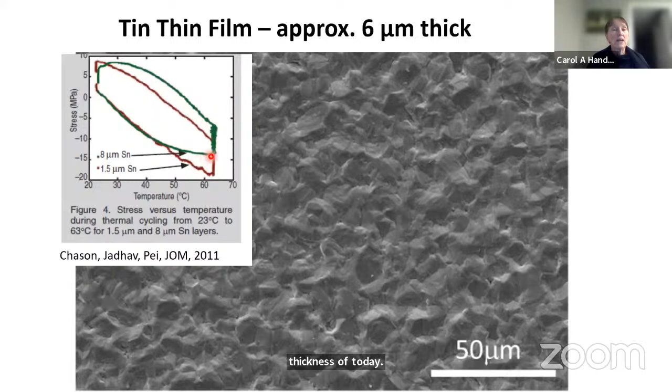And at some point, the stress begins to relax. This is a thinner film. We're not going to go into the thickness effects today, but the thin film relaxes the stress. And the way it relaxes the stress is by forming tin whiskers. So these are individual grains in diameter, and they can grow to millimeters, multiple millimeters in length.

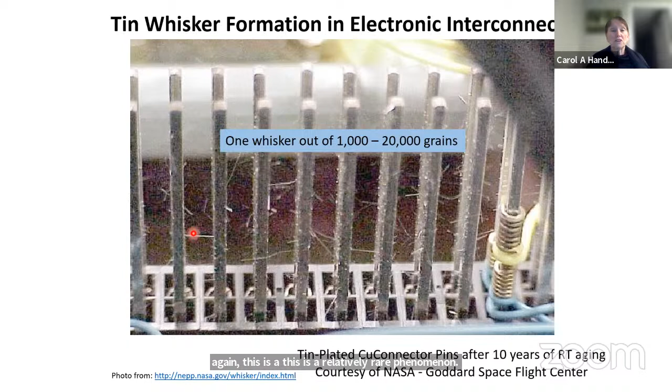This is a set of connectors. So these are probably, I'd say, 5 or 6 millimeters apart. So these are single crystals that form from the film, and these are forming because they relax the compressive stress in the film. So it can be typically one whisker out of 1,000 to 20,000 grains. So again, this is a relatively rare phenomenon. And so I've spent quite a few years trying to understand what made those particular grains form whiskers.

So here's a scenario. This is the tin film; in this case, it's a copper substrate. And at room temperature, the tin and the copper react to form an intermetallic. So remember that tin at room temperature is about 60% of the melting point. So there's plenty of diffusion that happens, and so these intermetallics grow. So what happens in this particular situation is when the intermetallics grow, they create a compressive stress in the film. So you don't even have to have a mismatch in the thermal expansion coefficient.

The formation of this intermetallic leads to a compressive stress. And so if you see here, this is the way that we understand this. This is a schematic of a single columnar grain. And this is the film thickness, and they're essentially columnar grains. So these would be the grain boundaries. This is the substrate or the interface with the intermetallic. This is the free surface.

So if you remember from some of your classes, there's creep of a single grain under biaxial compression. So here's the stresses here. What happens is you end up with a stress gradient between the compressive grain boundaries and the free surfaces. So you get net motion of atoms from the boundary to the free surfaces. If it's grain boundary diffusion controlled, that's called Coble creep. And if it's lattice diffusion controlled, it's Nabarro-Herring creep. So that's a way that all of the grains in the whole structure could relax.

However, in the tin situation, tin forms a very strong oxide on the free surface, and it makes this be a poor sink for atoms. So it suppresses Coble and Nabarro-Herring creep. So now you have a film, and you have lots of grains being stressed at 60% of the melting point. And how is the stress relaxation going to take place?

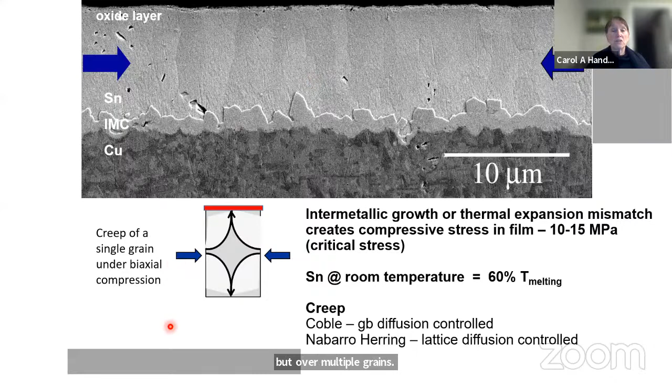Well, the way it takes place is that there are some particular grains in the structure, we'll get to exactly why and how, that can become a longer range sink for atoms. So diffusion happens not just in a single grain, but over multiple grains. And there's growth of the whiskers. So there's the substrate, and the oxide suppresses diffusional creep.

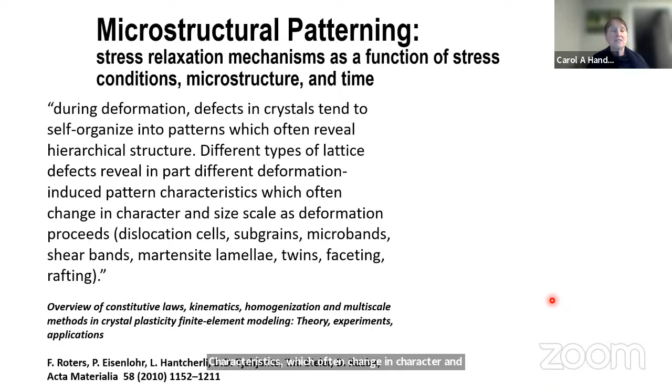And there were changes that were happening in the grain boundaries in the underlying film that led to these changes. And the bottom, this is a thermally cycled film where you can see there are a lot of changes that happen over time, and we'll get to some of those later. But all of these are responding to the local stresses, how they change, and which deformation behaviors actually begin to be dominating. So in our case, we have whisker formation, cracking, grain boundary sliding, grain boundary migration, grain rotation. And so I'm going to try to hit some of the high points in the talk today.

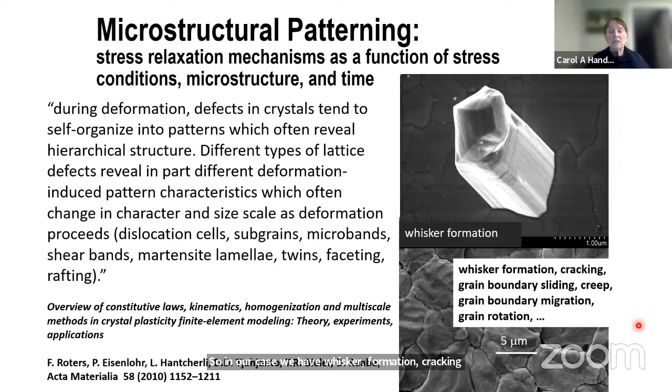So again, this is my favorite whisker. And so here I've broken it down so you can see what the different steps were. So this was the first step: it was a film from the free surface looking like any other grain in the film. The grain boundary migrated out as it also accreted. So you can see that relative to the orientation here, this is tilted upward. So it migrated out, tilted upward, but not over on this side. It migrated back, so that's why it's undercut here. It migrated to this point, and then it began to migrate out. And then at about this position number 5, the whisker uniformly grows from the film.

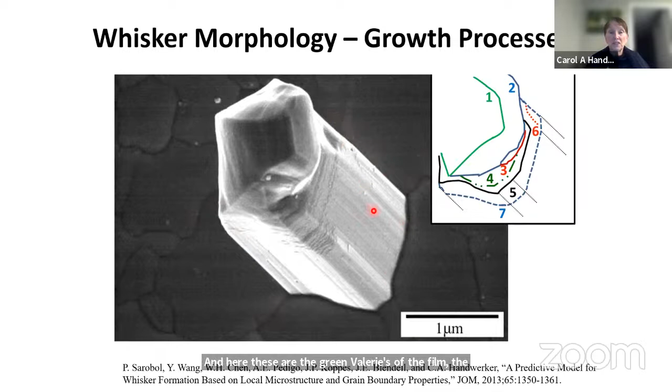And what that means is all of the underlying grain boundaries present in here are all accreting atoms. The atoms are diffusing there, and then they're pushing up the whisker uniformly. So you can see what the underlying grain boundaries are. These are grain boundary grooves here. So this is the whisker. This defines where the grain boundaries are in the film for the whisker grain. And here, these are the grain boundaries of the grains that are surrounding it. So this, again, is a shallow grain, and we'll get to some of those features in a minute.

Now, I took a lot of inspiration from this paper by Trinks and Volkert. I had been working on this area for quite a long time, but they have done what I think is the definitive work in trying to break down what the different kinds of deformation mechanisms operating are. So they have a thin film as a function of the strain amplitude. They put a thin film on a cantilever, and they vibrate the cantilever, and there is a strain gradient along the length of the cantilever. The stresses are highest here at the hinge and lowest here. So we have a strain amplitude. The strain's highest at the hinge, and then the stress is created there because there are strains as the film is bent.

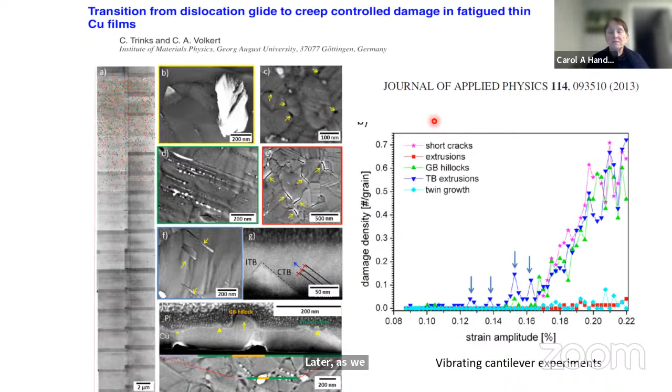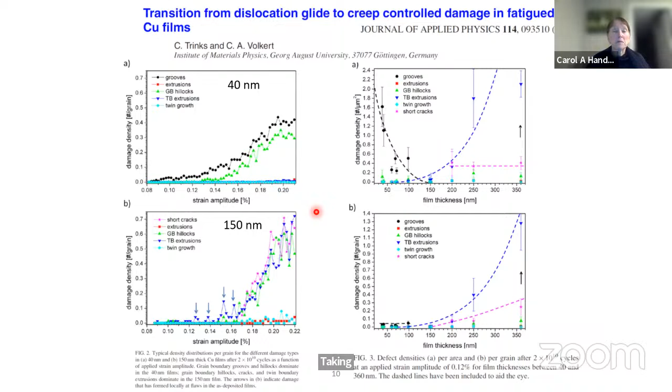So in this particular case, they could see 5 different signatures on the free surface that show the stress being relaxed by different kinds of phenomena. I won't go into all of these; they'll come up later. The other thing that's really interesting is they did experiments as a function of film thickness. They could see the different distributions of damage with different mechanisms as a function of film thickness. So this really opens up a wide range of experiments that one can do. So taking inspiration from this, the last set of experiments I'll show you were ones that we did on vibrating cantilevers for tin.

So these are some of the key ideas. In almost every thin film, at least metal thin film, stress relaxation is heterogeneous. It depends on the material. It depends on the microstructure, the crystallographic texture, the composition of the film, how anisotropic it is, and what the base microstructure is. It depends on what the stress state is, the strain rates. As you know, when you do normal stress-strain curves, the strain rate matters, the total strain matters. And so these are all important factors.

Shallow grains lead to stress gradients that I'll show you in a while. And then there's a competition between different stress relaxation processes with different signatures. And one of the things that we're aiming to do is to develop stress relaxation behavior and damage accumulation maps. These are Ashby-like maps that show how the structures behave and how they change. So here's just a quick schematic that shows an illustration of a whisker and a tin film. Each of the grains has a different orientation.

This is a representation of a tin crystal. This is the unit cell. So it's a body-centered tetragonal structure, a squashed structure. So you can see each of the grains has a different orientation, and they have different mechanical behavior. So when you strain them, the grains have different responses, even just to the elastic component of the strain, and so these also enter in this as well.

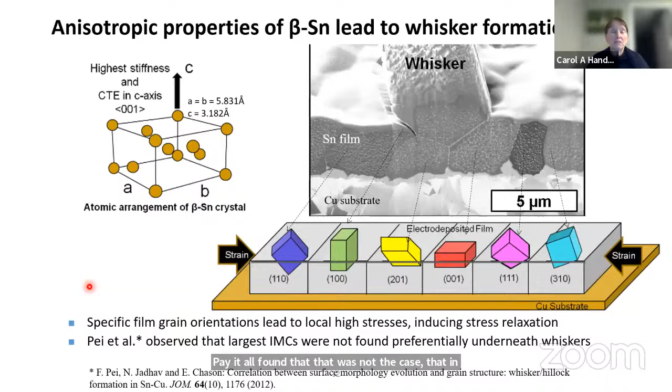What's interesting about very anisotropic systems is that the actual response depends upon how you put the stress on and what the temperatures are. So this is a skeleton structure. These are calculations for different crystallographic textures. So this one is predominantly an 001 texture, 111, etc. And given that the elastic anisotropy in these systems is really high, in this case, for example, an 001 texture, this is ambient and these are elastic strain energy density plots. So this is just assuming that it's elastic.

If this is with the intermetallics growing between them, where red are the hot spots where one would expect the stresses would be higher, the pattern here is very different from the kinds of patterns that you would see for thermal expansion differences. So this makes the problems a little more difficult to sort through, but I think we've made some progress in that. So it matters if you're trying to mitigate this and you don't want the whiskers to form.

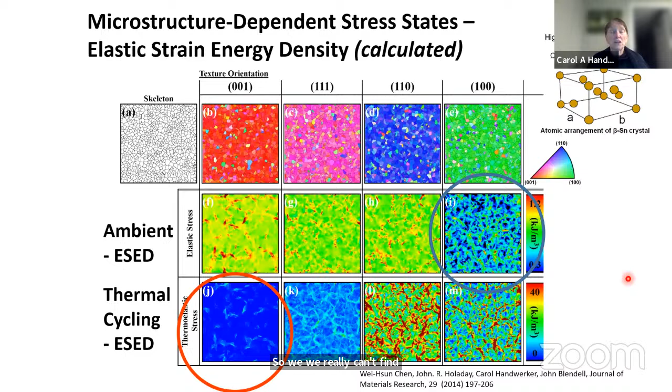So if we were trying to design a texture for the ambient condition, the intermetallic growth picture, we would choose this one. However, if it's also exposed to thermal cycling, you would choose this one, which is about the worst for the ambient. So we really can't find general microstructural features that would change the tin whisker risk.

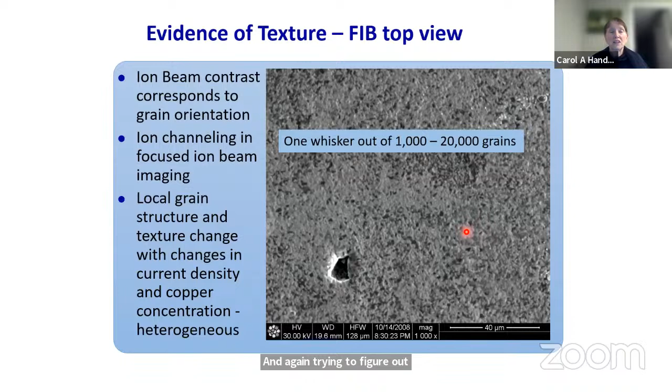So here's an ion beam contrast image that shows grain orientation. You can see here the darker ones are all grains in the same orientation. So even when we measure the crystallographic texture, there are pockets that have higher densities of certain orientations. And again, trying to figure out how one whisker out of 1,000 or 20,000 grains forms has been challenging.

So here are just some of the microstructures that one sees. This is a hillock. This is the original grain that popped up. Grain boundary migration took place, and this is the final position of the grain boundary. The shallow grain is underneath. So we have a lot of different features of the stress relaxation, many of them just how the individual grains shape. The grains actually rotate. They can break up. Cracking, grain boundary migration, new grains can nucleate, and slip bands.

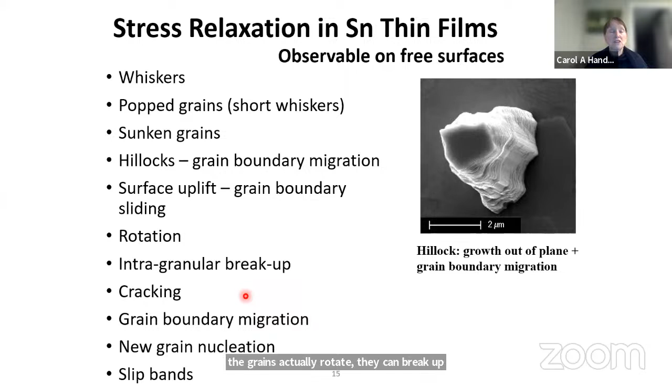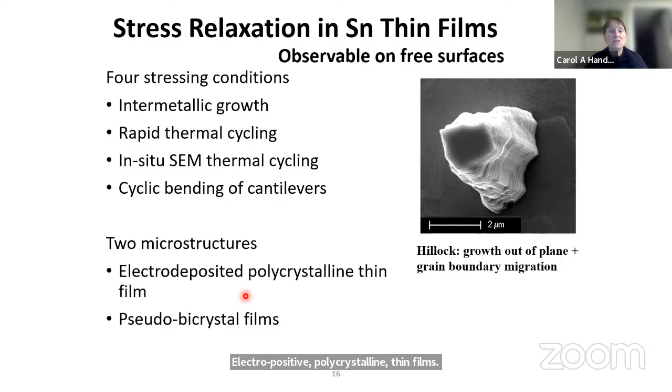So we're focusing on dynamics and the microstructure. There are four different conditions that we've explored: intermetallic growth, rapid thermal cycling, in situ SEM thermal cycling, which I'll not be talking about today, and different microstructures: electrodeposited polycrystalline thin films, which most of the ones I've shown you so far are, and then some pseudo bicrystal thin films.

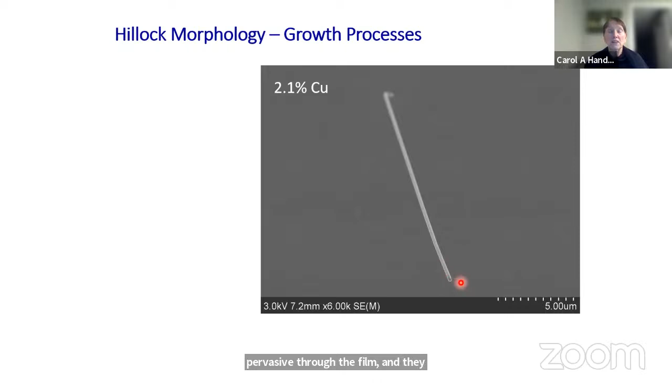So we know we can control the microstructures that form by changing the characteristics of the film. So this film has 2.1% copper in it. There are intermetallic particles that are pervasive through the film, and so this whisker grew out of the film with little or no grain boundary migration. So you can suppress the grain boundary migration by pinning the grain boundaries.

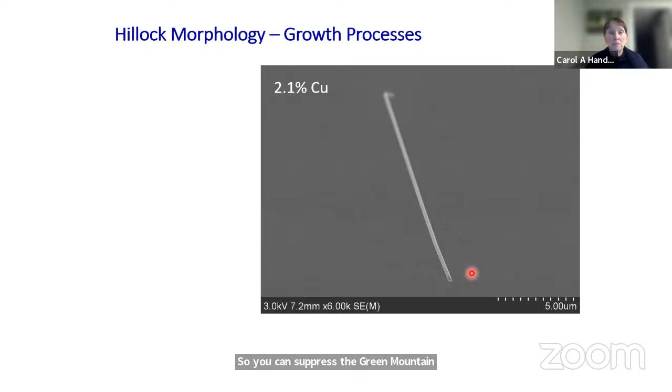This is one with zero copper in it, so the grain boundaries were not pinned. And again, you can see this is the pattern over time. We've done in situ experiments with this where the grain will grow out for a while, then the grain boundary migrates, and then it grows out again and the grain boundary migrates. And so these are quite dynamic changes. You can see here this is where the triple junction was as a function of time, from here down to here.

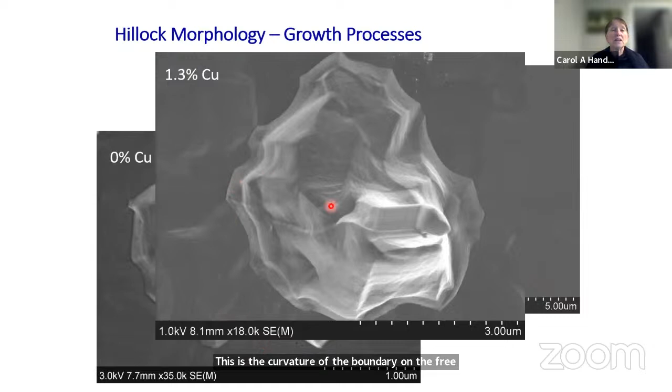And all of these, again, this is the curvature of the boundary on the free surface. And this is one in between. So you can see it grew up as a whisker over some amount of time. Again, this is the triple junction moving down.

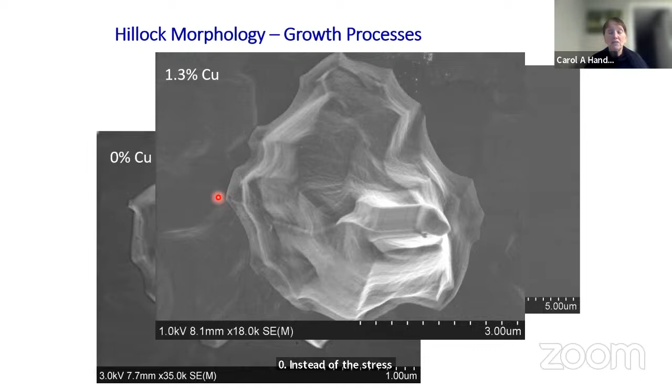And so it's important to note that if this were just migrating due to curvature, the shallow grain, due to curvature, would actually shrink away to 0. And so the stress stabilizes this shallow grain and forces the grain boundary migration.

So the way we've thought about this is a problem that is a trade-off between accretion of atoms at the bottom to relax the stress and grain boundary sliding. So this is a schematic of a cylindrical grain in a film. Imagine most of the grains in the film look sort of like this, right? But this is just a schematic of a cylindrical one. It's got a radius R, a height H, and the film thickness T.

And if all of these are the same, there's a grain boundary sliding stress, because remember, this grain is being constrained by being in a compressively stressed film, so it actually takes a force to push the grain out against the sliding stress.

So we did a simple calculation. So this is the accretion stress. The stress down here pushing it up is pi r squared times that stress, and it has to be greater than 2 pi r h, which is the cylindrical area, times the sliding friction. So it's a simple equation.

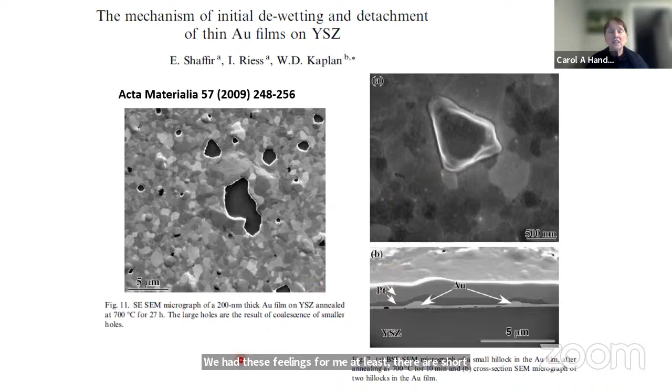And there is a paper by Shaffir, Riess, and Kaplan where, as just a throwaway comment, they said, oh, by the way, we had these hillocks forming. Hillocks, which are short whiskers, and they formed only where the largest grains formed.

So now let's move to how we describe tin whisker formation. We have again this cylindrical grain, and we also have an oxide layer on the top surface. So not only does the accretion stress have to be greater than the grain boundary sliding stresses, we also have to actually be able to break the oxide. So that's the oxide fracture stress. And so we come up with a set of equations that describes what that trade-off should be.

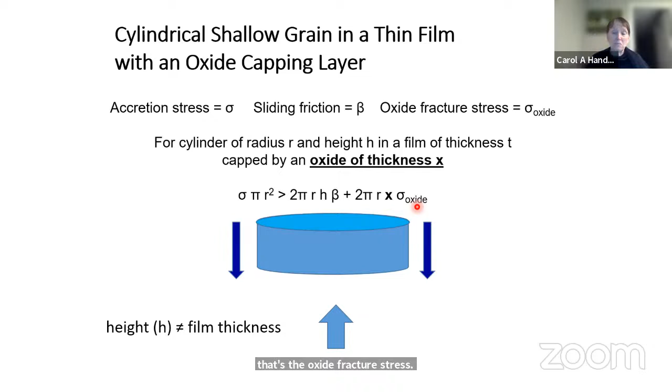And here's one set of experiments we were doing in silver. This illustrates in silver what happens if we put even an organic film on the free surface. This is a 50 nanometer thick film on silicon, and we heated it up and cooled it down. The student did extensive microstructure analysis through here in EBSD. And unfortunately, that led to formation of an organic film on the surface.

And what you're seeing on the free surface, these are AFM, is that the hillocks and whiskers formed outside of this region that we thoroughly characterized. So this actually is an illustration of the role of an oxide or a capping layer film. So this was a contamination layer.

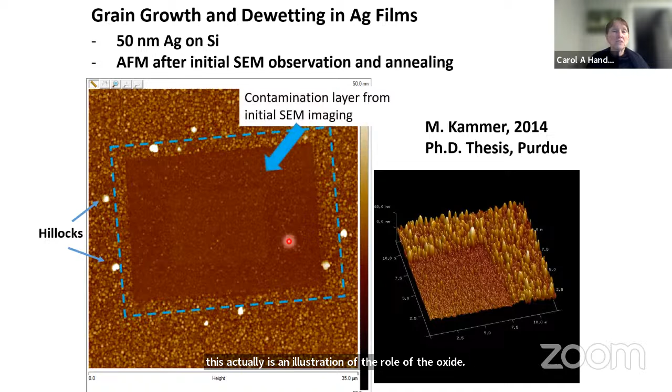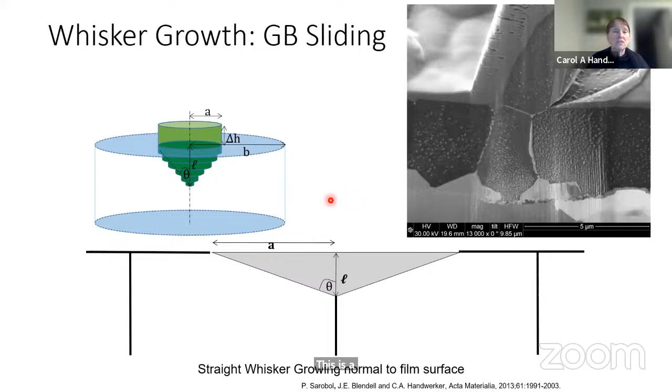So let's transform this whisker growth: we have a shallow grain. Instead of a cylindrical grain, this is a schematic of what a shallow grain would look like in the film, and a straight whisker growing normal to the film surface. So we have, again, compressive stress.

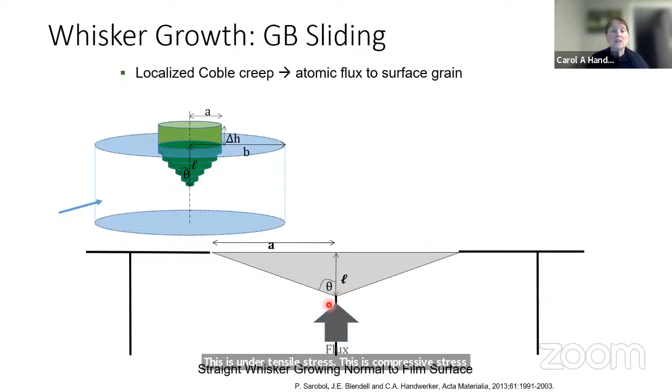The position here, like on the free surfaces, is under tensile stress relative to these boundaries. And so there's a difference in vacancy concentration between here and here. This is under tensile stress. This is compressive stress. So there are more vacancies here than here. So the vacancies migrate here, the atoms move here, and this is how the whisker grows.

And so we took this a little further, having sliding planes. So these are the sliding planes and accretion planes. We developed a model that looked at what that balance would have to be in order for whiskers to grow.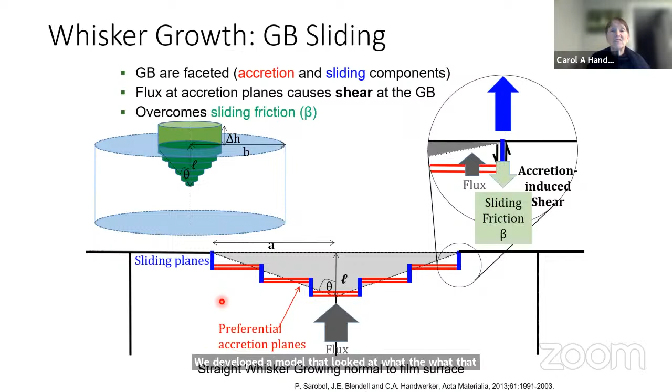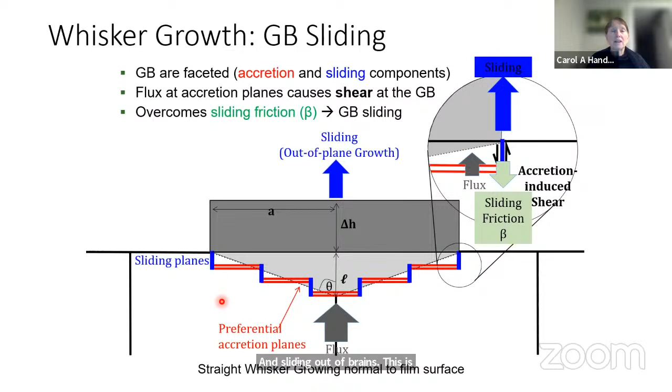And so we have a paper in Acta Materialia that talks about what those transitions are. When the accretion stresses are high enough, we get out-of-plane growth and sliding out of grains. This is grain boundary sliding limited Coble creep that causes whisker formation.

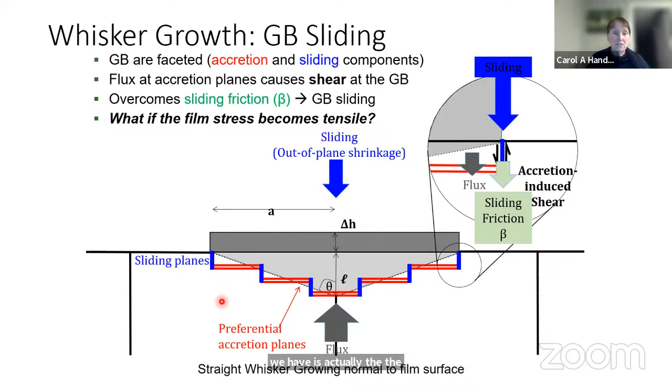And so if the film becomes tensile, what we have is actually these grains can become sources of atoms. And so we can see grains growing and shrinking. And I just recommend you going to the paper, and we have models of what the growth rate is as a function of these parameters.

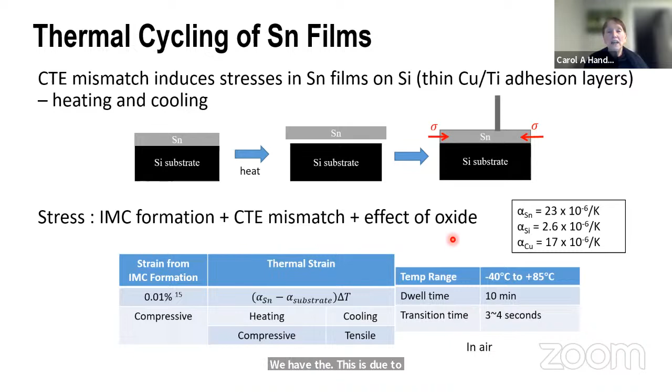So I'm going to show you a few experiments where we have additional phenomena that are happening. This is CTE induced stresses in tin films on silicon. So it's heating and cooling. So we have the silicon substrates. And so in this case, we have the stresses due to intermetallic formation and CTE mismatch, and we have the effect of the oxides. We have all of these.

And so one of the things that we see, and we're following these, the graduate student followed these changes over multiple areas. So there are 9 regions in the system as a function of number of cycles, and was able to determine how the different microstructural changes happen. We couldn't do EBSD on these; the samples were too rough. As you see here, we have whisker formation here. We start to have more cracking.

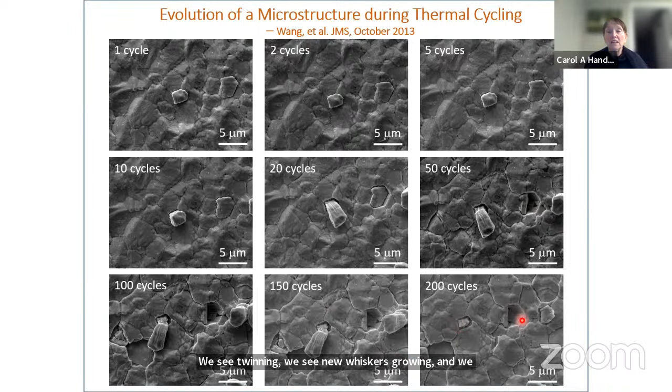There's more whisker formation with 20 cycles, but what we're seeing is actually there's a decrease in diameter as the whisker grows. We see twinning, we see new whiskers growing, and we also see a phenomena where the whiskers actually pinch off. In this particular region, these grains actually sank.

So in the whisker formation during rapid thermal cycling, what we see is that if we're thermally cycling it, we go to high temperatures, so the film's under compressive stress, low temperatures, it's under tensile stress because it's relaxed in between. So we see this grooving at the whisker root. We see the whisker diameter decreasing. We see striation rings on the whisker surface, sort of like tree rings, that each thermal cycle corresponds to one of these. And this is just showing what an ambient one looks like due to intermetallic growth.

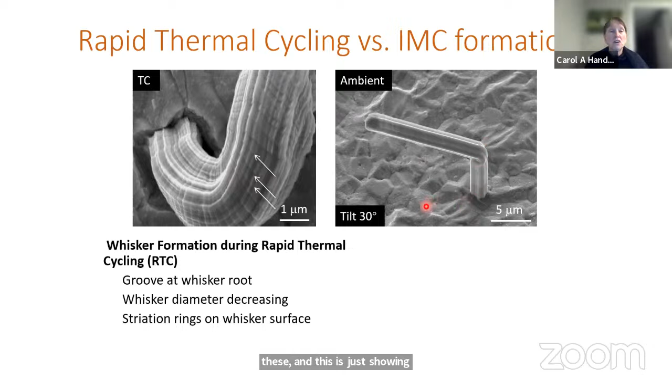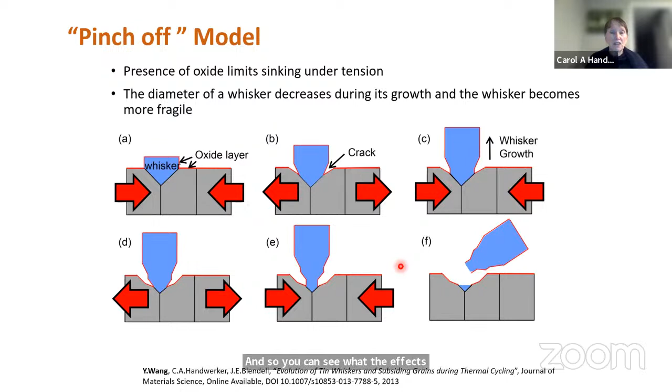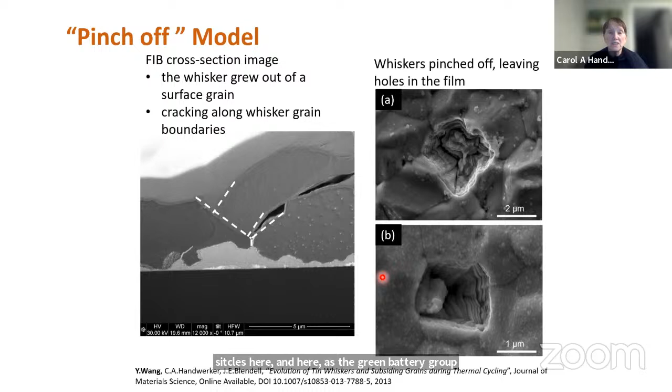So what we found was that we actually get pinch off of the grains. And so you can see what the effects of compressive and tensile stresses are. And in the end, in this case, you see that there was grain boundary grooving on one side, but not on the other side. This is a FIB cross-section of the whisker growing up. And you can see the holes that formed, which again each corresponds to one of the thermal cycles here and here, as the grain boundary groove penetrates and eventually the whiskers become so fragile that they break off.

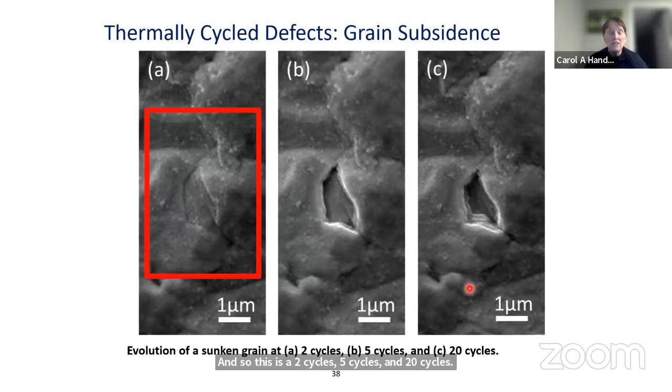And here's a case where there's a sunken grain. So some grains only respond to the tensile stress component of it. And so this is at 2 cycles, 5 cycles, and 20 cycles. And you can see this grain actually became a source of atoms for stress relaxation in other places in the film. So we've done a lot of work on trying to classify what the different phenomena were.

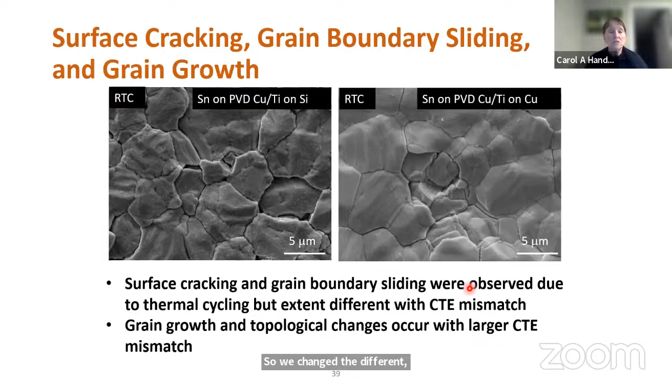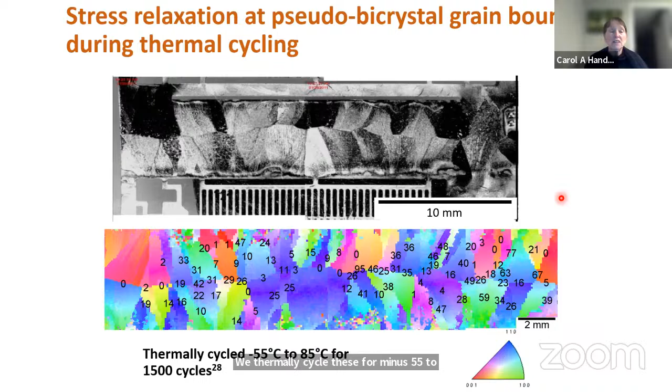Surface cracking and grain boundary sliding were observed due to thermal cycling, but the extent was different with CTE mismatch. So we changed the thermal expansion coefficients by changing the substrates, and we looked at these in lots of different ways. We also looked at pseudo bicrystal films to try to see what's happening along these grain boundaries. So again, this is a tin thin film, but formed by melting and solidification. So it's about 20 or 30 microns thick. We thermally cycled these from -55 to 85 degrees C for 1,500 cycles.

And so what we saw was near the grain boundaries, we would form whiskers. We had regions that completely recrystallized. There was grain boundary sliding. And I'm not going to be able to share with you all the different components of this. But one of the things that we realized by moving to the bicrystal films, and initially for these grains there is a single orientation all the way up to the grain boundary, is that because we're nucleating new grains, the dislocations must somehow be involved.

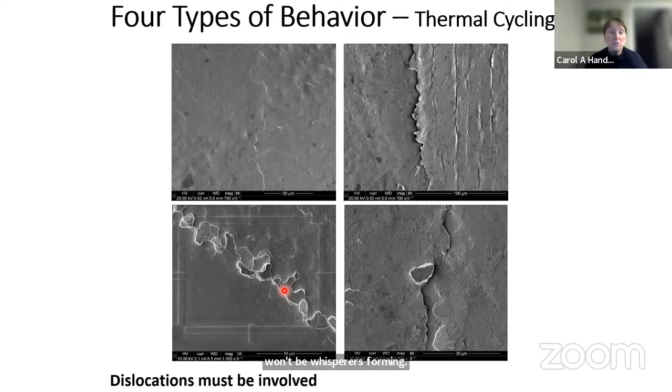And we think they're also involved in the polycrystalline thin films and columnar systems, because you can see that there won't be whiskers forming, and then all of a sudden at a critical point, the whiskers will begin to form. So these were 4 different phenomena that we saw. No changes, sliding, nucleation of new grains, and then combinations of the two.

And one of the key things that we found in doing FIB cross sections here is that we could see that there was nucleation of new grains. So in this case, C is over here. So there's a change in orientation here. The top surface is tilting up, and as it tilts up, this tilting up corresponds to actually a change in orientation and it must be happening by accretion of dislocations in here.

So we do EBSD here, and at other positions along the boundaries, this is the original boundary, we see the formation of a new grain boundary by the accumulation of those dislocations. And then once the boundary actually forms, then the whisker can begin to grow. It grows on both sides, not just tilting up.

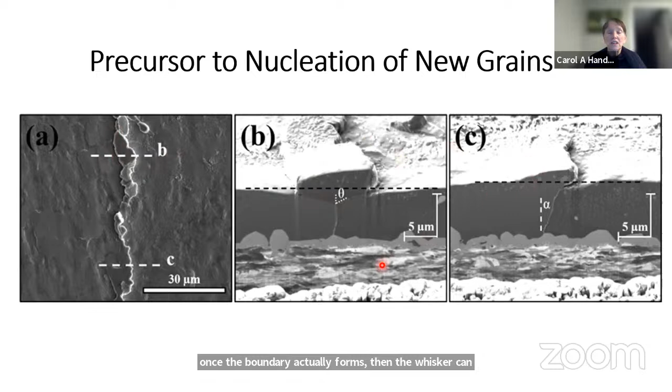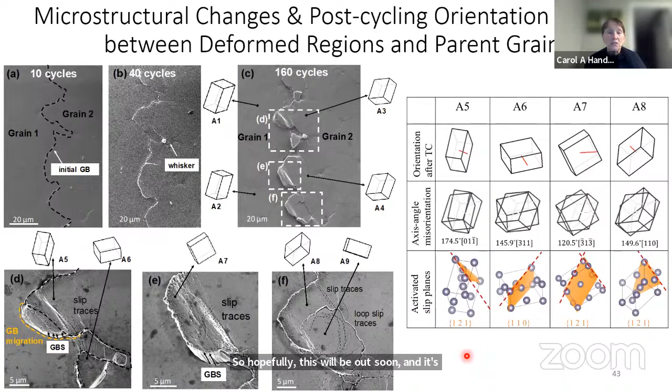So we've done some extensive work, I'm not going to go into it, characterizing what those changes are as a function of number of cycles and when the nucleation happens, because most of our experiments earlier on were just a before and after thermal cycling. So hopefully this will be out soon, and it's fascinating work. It was really painstaking for Sung Ying Wang to do these experiments.

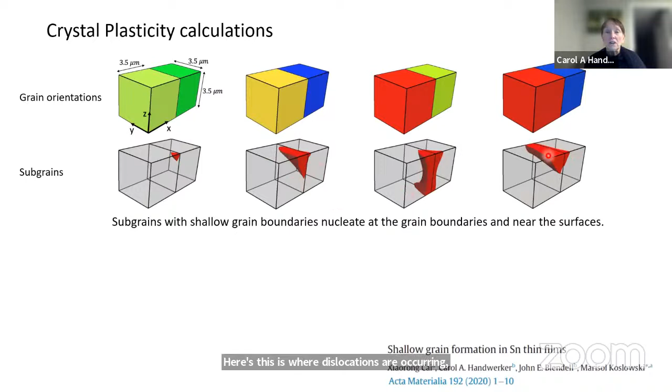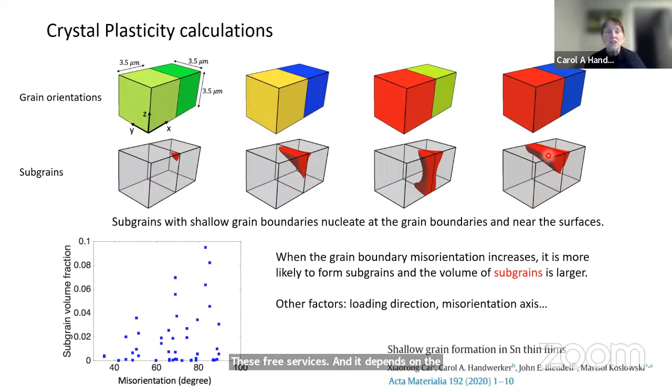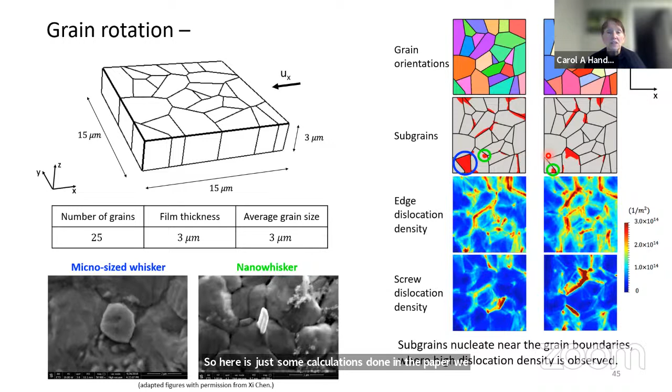So we've also done simulations that show this is where dislocations are accreting depending upon the misorientation. So we have some estimates of what the dislocation generation is near these free surfaces, and it depends on the loading direction, misorientation axis, and they're not everywhere. So here are just some calculations done in a paper we wrote, seeing what the dislocation densities would be. But I'm not going to go into these details.

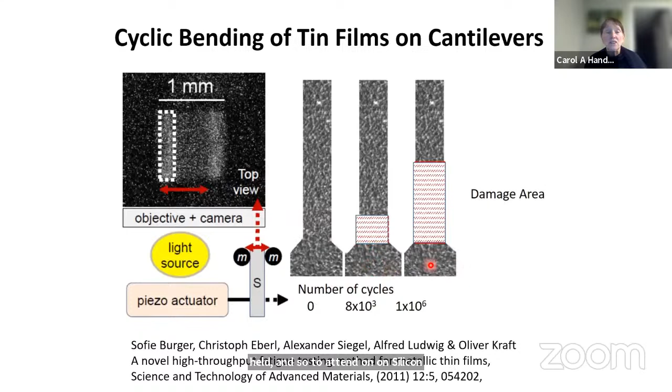We did some experiments on cantilevers. They're vibrating the cantilevers, and so this is where they're held. And so tin on silicon on copper, and you can see as a function of number of cycles, this illustrates the damage area. So here the strain varies linearly along a cantilever. So please take advantage of that wherever you can, because it means that the strain amplitude can be varied. So this is along the cantilever in a single experiment.

So what we saw was tin whisker formation. We saw breakup of grains, and I'm not going to go into much detail. Instead of the original grains forming whiskers, we nucleated new whiskers along the grain boundaries, and these new whiskers could grow hundreds of microns in a very short time. And here are breakups of grains, and these have been seen in aluminum films and copper film and other films under different stress conditions.

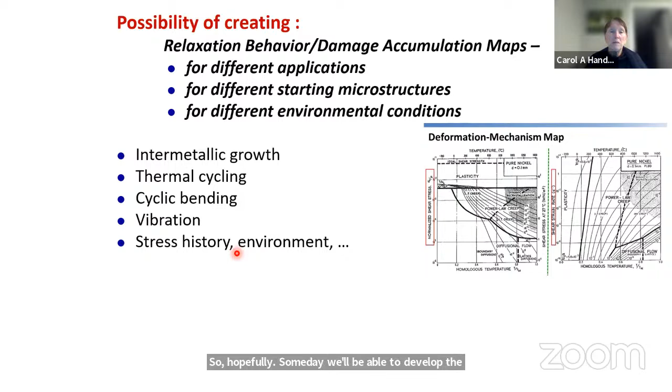So we have number of cycle dependent, time dependent behavior, and we were able to basically go backward to make the link then to the Trinks and Volker paper to really begin to determine the distribution of deformation mechanism. So hopefully someday we'll be able to develop these behavior maps. These are some Ashby maps on the right-hand side for different conditions.

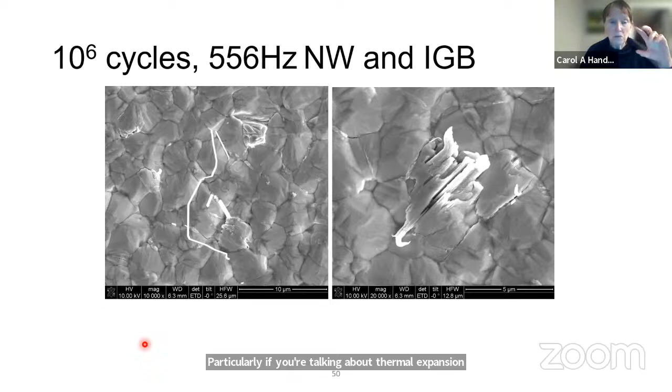And so I think that's one of the reasons why surface energy doesn't play a significant role as far as I know. The other thing is that this happens in gold and silver, and there are conditions where we can make all of these happen in different systems. So I think the surface energy is a small component, particularly if you're talking about thermal expansion mismatches, because you can generate really large stresses due to the thermal expansion mismatches between the tin film and silicon, or gold and silicon. So those, I think, have an even bigger role to play.

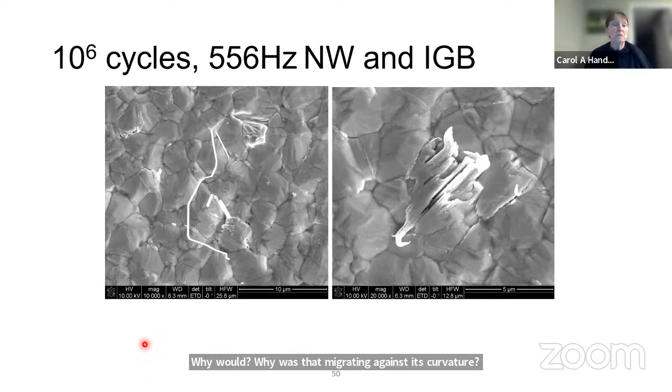For example, in making the grain boundaries of the small surface grains, the grains grow, and it's very much like the abnormal grain growth problem. Why was that migrating against its curvature? Well, in this particular case, they're migrating against the curvature. Surface energy effects would actually have them collapse to zero. So that's our analysis. If you have other suggestions, I'd love to hear them.

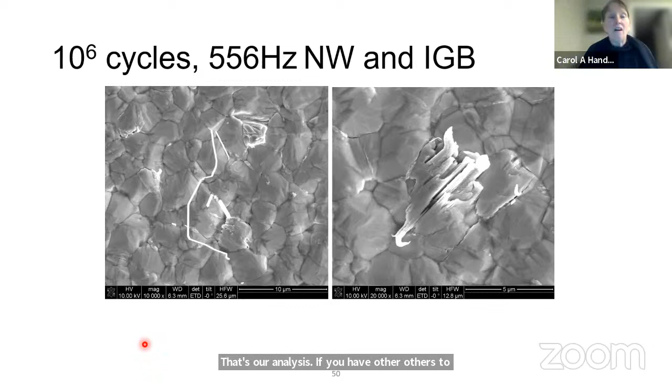Not in particular, thanks. Very interesting phenomena here. So, thank you.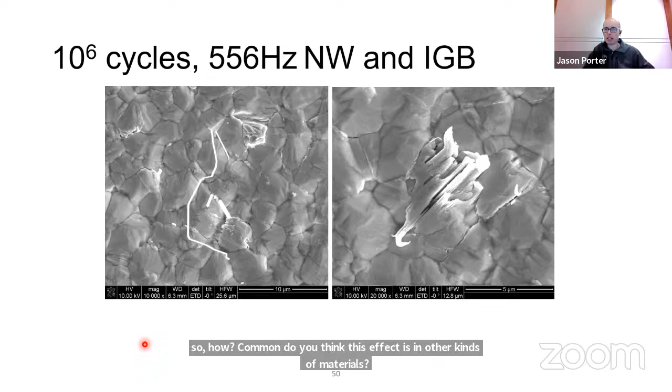I have a quick question. Please. So how common do you think this effect is in other kinds of materials? Does it happen in a lot of materials, or do you think that tin is pretty unique? So first of all, tin is not unique. Another system that does this is aluminum. And aluminum has a natural oxide layer on it, and it's been known to happen for many years in aluminum films. That is among the earliest literature in this.

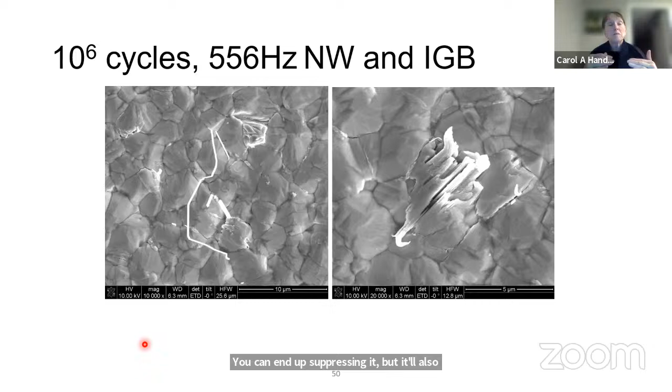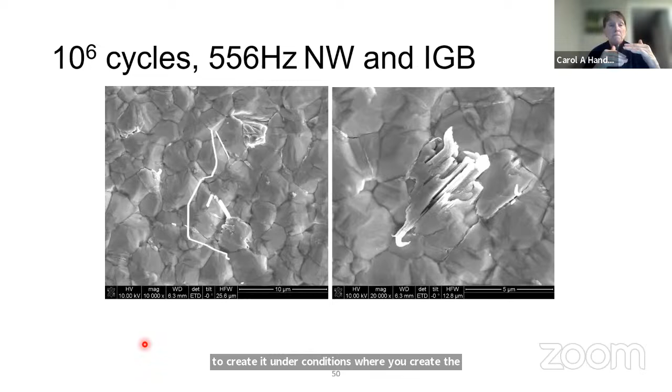So I think if you can make the capping layer thick enough, you can end up suppressing it, but it also depends upon what stresses you impart to it. So with aluminum, the strains have to be imposed by the thermal expansion mismatch, and they have to be quite large. And you have to create the strains under conditions where you don't activate lots of other stress relaxation mechanisms. So for example, in the tin films, if I heat them up to slightly higher temperatures, then the whiskers don't form.

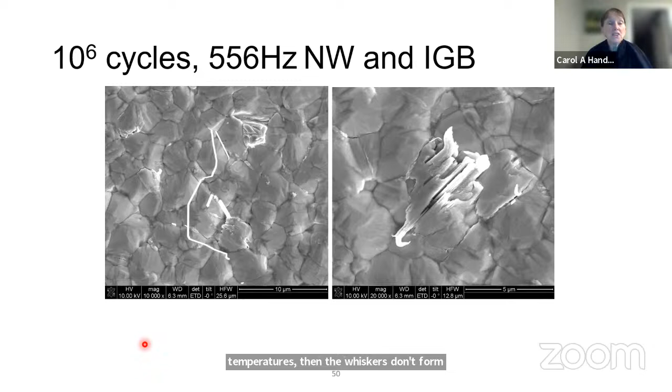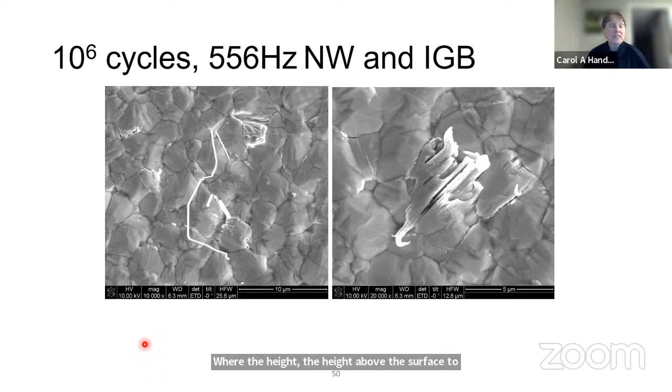So you bring in other kinds of stress relaxation phenomena. They change as a function of temperature. But aluminum is the classic case. I don't think anybody's tried in copper. We were working in silver films, and we certainly got hillocks to form in those films, which are short whiskers, where the height above the surface to diameter ratio is about 1:1. In gold, it's seen. I think it's the condition of having the film at 60% or more of its melting point, a tenacious oxide layer, and not many other stress relaxation mechanisms operating, that makes tin such a great whisker former.

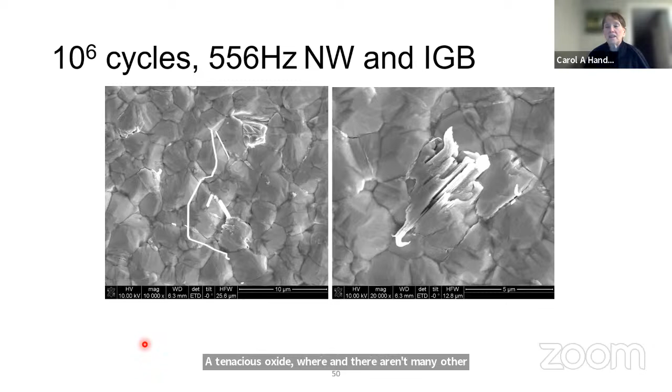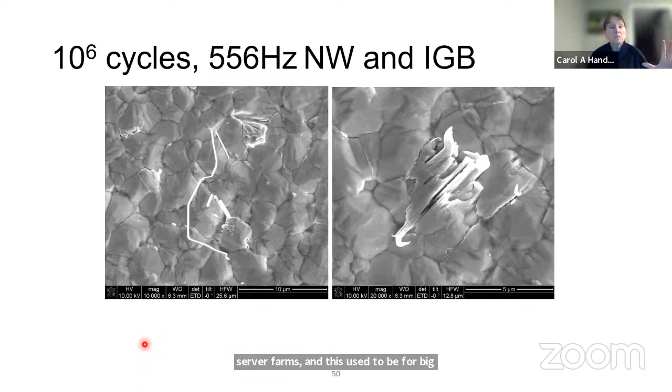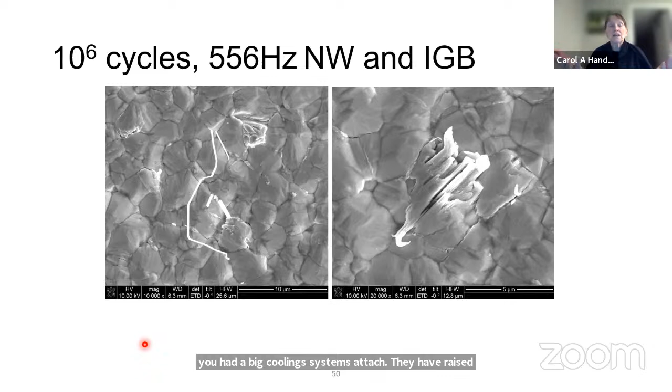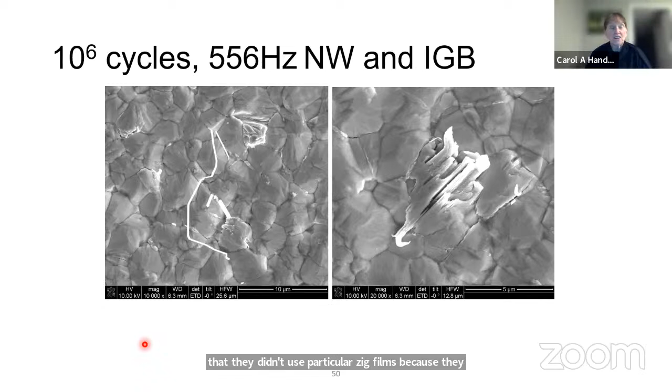Cadmium also forms whiskers. Zinc is another system that forms whiskers prolifically. And so in server systems, server farms, and this used to be for big computer mainframe systems where you had to have big cooling systems attached, they would have raised floors, and they had to make sure that they didn't use particular zinc films, because they would form whiskers, and then all the whiskers would break off and get sucked into the airflow and cause the computers to fail.

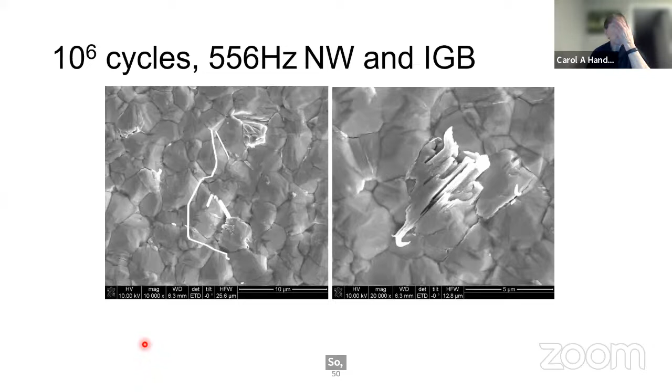So, yeah, I think you just have to choose your metal and decide what temperature regime and strain regime you have to go into to force this to happen.